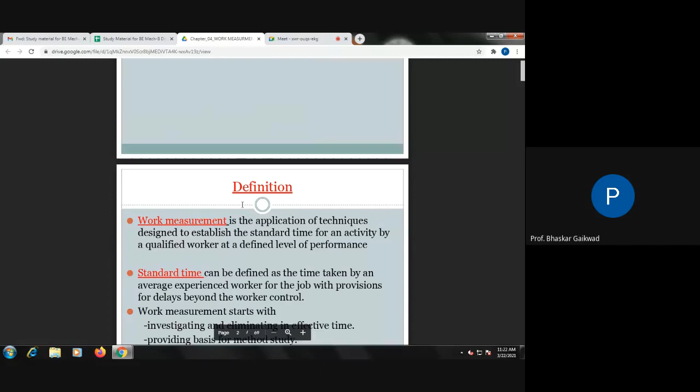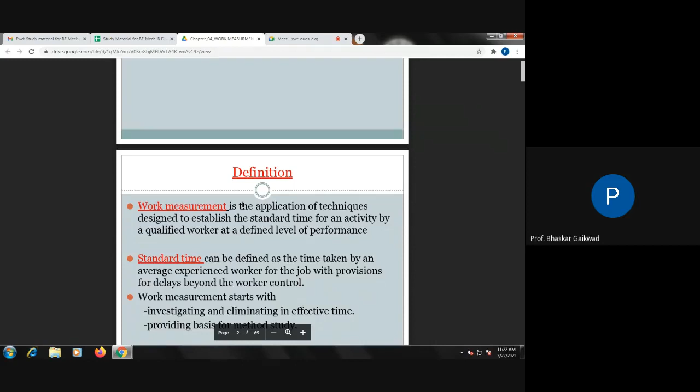Then next, standard time can be defined as the time taken by the average experienced worker for the job with provision for delays beyond the worker's control. Standard time, in technical language, means the observed time, whatever time we have observed while doing any job, into the rating, plus allowances. Which type of allowances, that we're going to see.

So the standard time is actually the time required to manufacture the product. How can we calculate this? The observed time into rating becomes the basic time or normal time. To that, if we add the allowance, it will become the standard time.

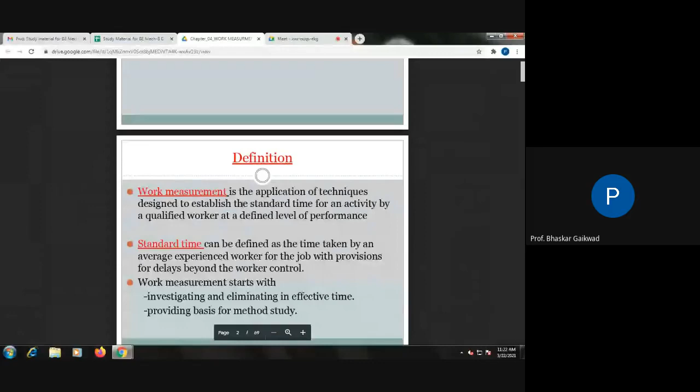Then next, what are the objectives of work measurement? Here, the downtimes or non-productive times we have to eliminate, or we have to make corrections in the downtimes. The second thing, we have to decide the standard times for jobs. Mainly, we can check the performance of the workers, and accordingly the salary, the bonus, totally the cost related to manpower will get calculated.

Then estimating man, material, machinery required by work measurement, how much man is required. Suppose we are going to manufacture 100 components: how much man is required, what is the cost of that, how much material is required, how much machinery is required, this also we will get. Next, the third point is to determine the available capacity for a given level of workforce and machinery, meaning what is actually the manufacturing capacity of our industry, this also we can judge through work measurement.

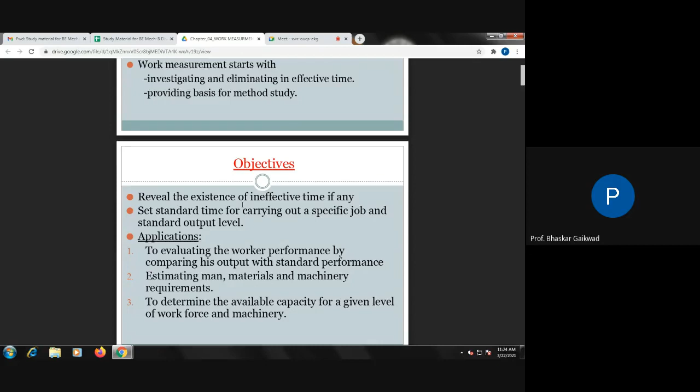Then next, we can use this work measurement to compare work methods for economical comparison: what is the existing method, and we can decide the improved methods and make the comparison. How much salary incentive we will have to give the worker is actually expected from work measurement. Facility and operation schedules, means production planning and control, are actually expected to be designed through work measurement. If work measurement is not there, we cannot go for production planning and control.

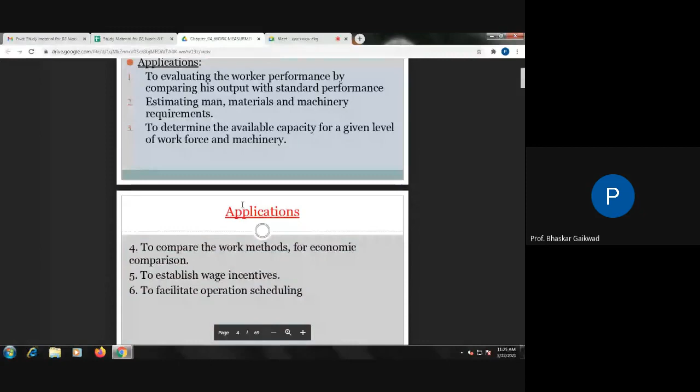We cannot give the particular payments to the workers. We cannot give the incentive. We cannot give the bonus. We cannot estimate the cost. We cannot decide the selling price of the component. So whenever the requirement is there, we can make use of this.

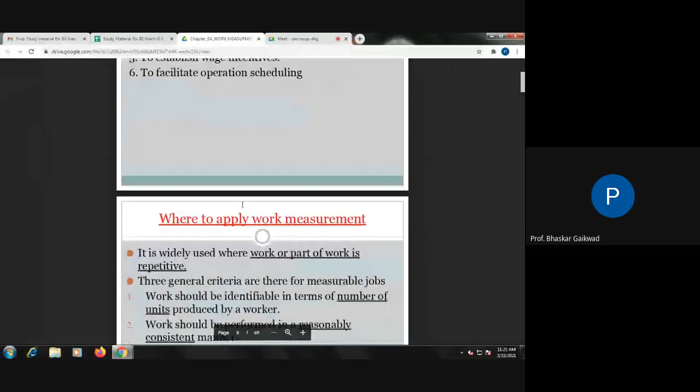Then where to apply work measurement? It is widely used where the work or part of the work is repetitive, means where mass production is there, we can use this. Next point, three general criteria are there for measurable jobs. Work should be identified in terms of number of units produced by the worker. The worker should perform in a reasonably consistent manner, means the workers need to perform reasonably and consistently. No gap in this.

Then next is the volume of the work should be justifiable to perform the study and keeping the record. How much quantity is going to be manufactured and what is actually expected. This judgment you will get.

Then the next part, basic procedure of work measurement. So yesterday we have gone through this. Select job to be studied. Which jobs you are going to select for work measurement? Normally, where the cost is very high, cost element is very high, repetitive work is there, problems to manufacture in that industry. So such jobs you have to select.

Where actually a big job is there and big time is required to manufacture this, repetitive part is there, then downtime is more. Under these conditions, you have to go there and select the jobs for study of the work measurement. Once you select the jobs for work measurement, then you have to go for the existing process of manufacturing, that is called recording. Okay.

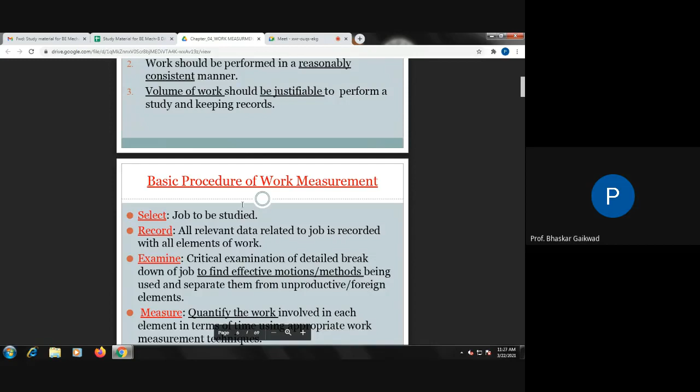How to measure the time required to complete the job. So measurement is actually, a qualified person has to do that work, and we have to decide the time. So this is the basic procedure. So here, basic procedure for work measurement.

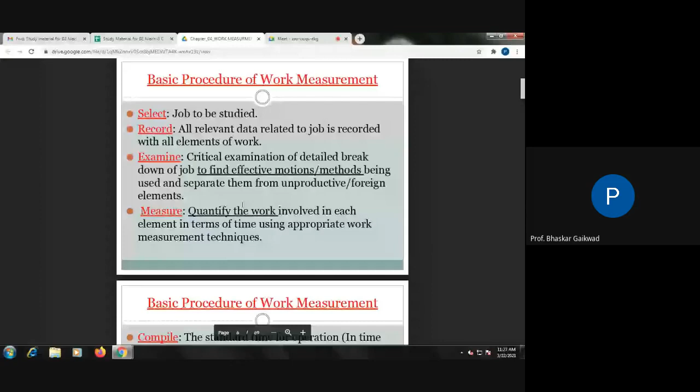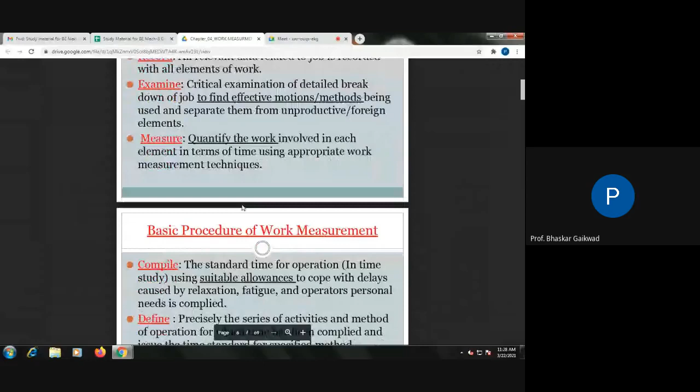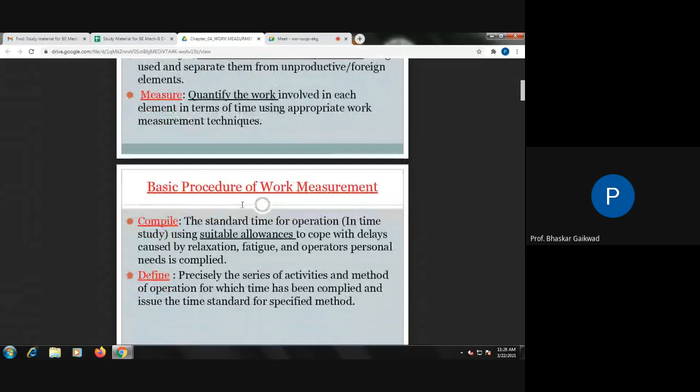Next page, compile these standards along with allowances. So many allowances are there. So here's the personal need allowance, contingency allowance. So many allowances are there. So you have to compare the different methods, means existing methods and new methods. Then define the new methods and install that new method. So these are the procedures for work measurement.

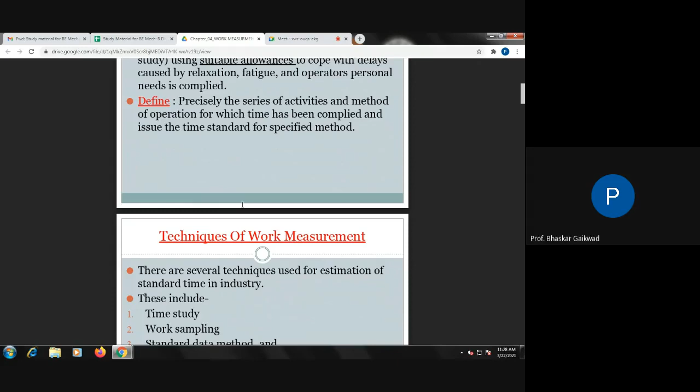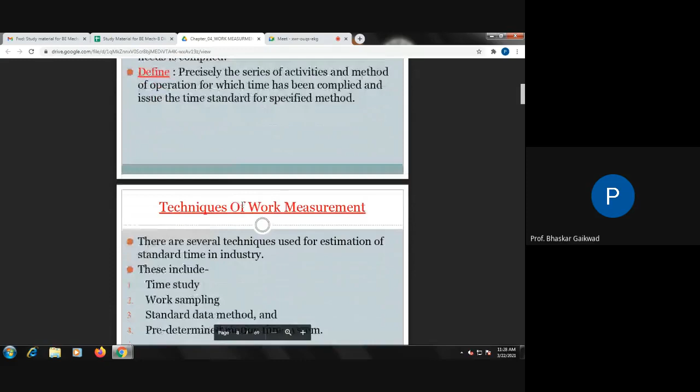Now technique. Yesterday we came to this point. Various techniques of work measurement. There are several techniques for work measurement used for estimation of standard times in industry. This includes time study, work sampling, standard data methods, predetermined motion time system. So these are the four techniques used in work measurement.

Time study means here actually we have to observe the time while manufacturing the jobs. Work sampling: when mass production is going on, two, three samples we can take, and on this basis we can take the work measure. Standard method means analytical methods with some standard data available with us. Through this we can do the work measurement.

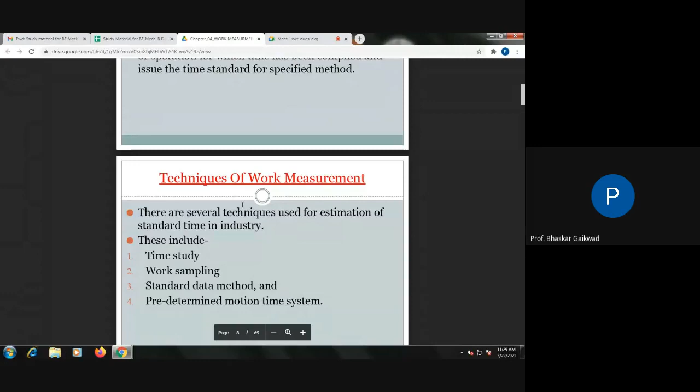Predetermined motion time system means here we can use the camera. We have to check the motion of the man while working, and those motions you have to note down along with the times required to complete that motion, and is it possible to reduce certain motions, is it possible to reduce this time. So through this predetermined motion time study we do this. So these are the four techniques of work measurement.

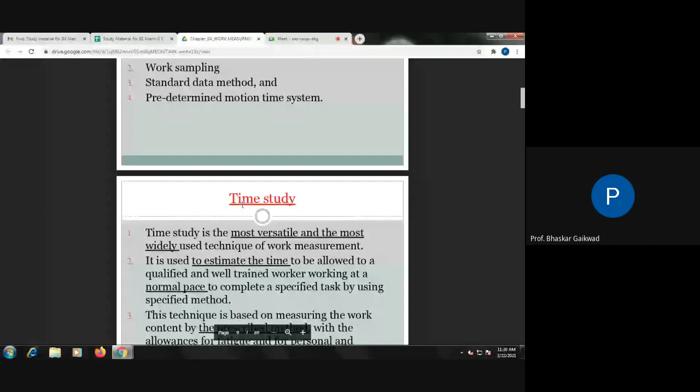Okay, now first we'll go through the time study. Once again, which part is important, and what are the numerical problems related to this, we are going to see on the blackboard. Time study is the most versatile and most widely used technique for work measurement. So more than 80-90% time study is used in industry for work measurement.

It is used to estimate the time allowed to qualified and well-trained workers. Means you have to select a qualified, experienced person, well-set person having the 100% level of performance. You can select that method. This technique is based upon measuring the work content of a prescribed method. Method is prescribed. What is that? We are going to see. With allowance for fatigue and personal needs and unavoidable delays.

So first, the time we require for the work measurement, that we have to observe, multiply by rating, and in that we have to add the allowances: fatigue allowance, personal, unavoidable delay means the contingency allowance. How many allowances are there? First we'll see this.

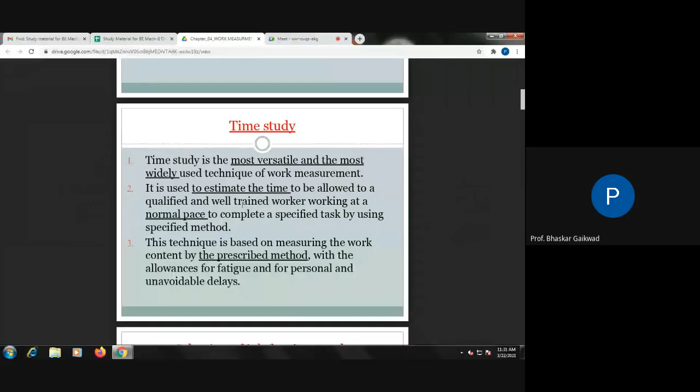So here, in short, again the selection of jobs, new jobs. We can use this work study for operations that are bottlenecks in the production. Some problems are there. Bottlenecks means problem. Whenever a problem is there in production, you can make use of work measurement.

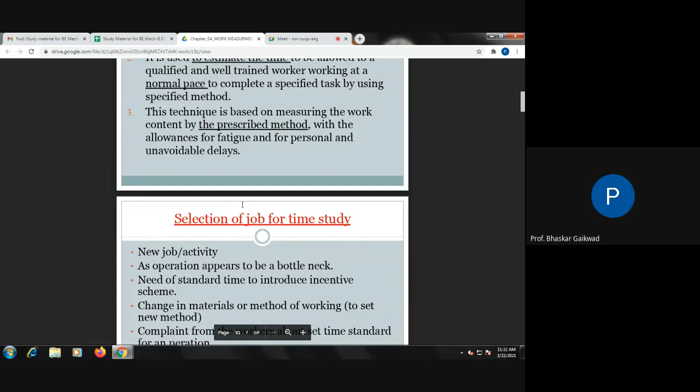Then need of standard time to introduce an incentive scheme. Suppose I want to introduce some incentive scheme, motivational thing and bonus. Then we require this. Then change in materials or method of working, new set method. So if you want to change material, then we can use this.

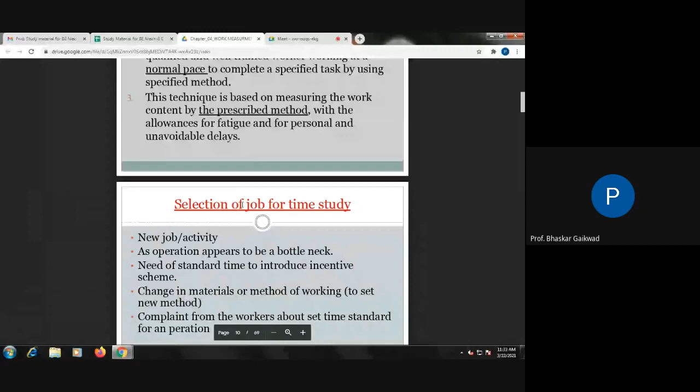Excessive idle time of machines, extremely low output, means some machines are taking more time. Why is this so? Under such situations we can use this.

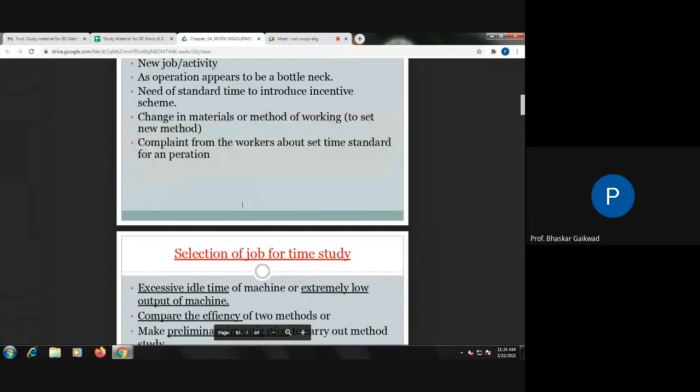Compare the efficiency of two methods, present method versus, as I gave examples yesterday, we can manufacture jobs on a lathe machine and the same job we can manufacture on CNC.

Compare this. Make preliminary investigations to carry out the method study. First the investigation, then you can concentrate on the most costly jobs. Need to go for work.

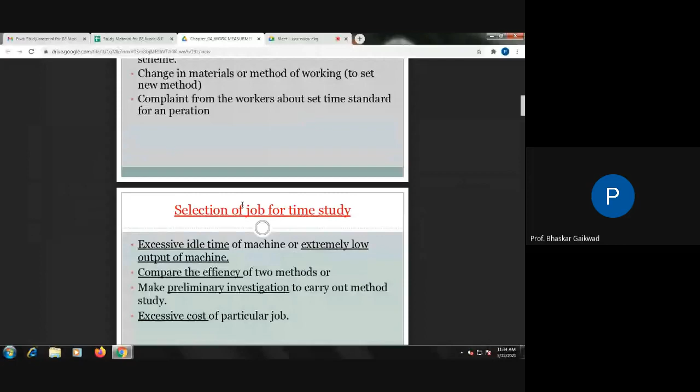Then selection of worker for time study: qualified, experienced, high levels. This much you have to remember.

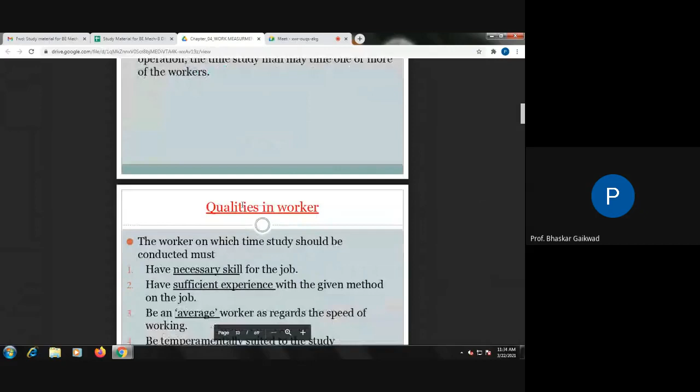Quality of workers, skill is there, experience is there, and they should have good knowledge. Such a person we can use for time study.

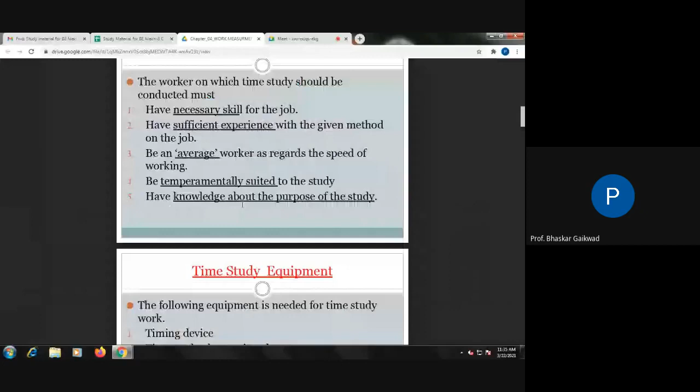Time study equipment, this is important. Some points are repeated here, but always remember while making the time study, qualified, skilled, experienced and higher level of persons are required.

Whenever a high costly product is there and the machine requires more time, we need to introduce an incentive bonus scheme. We have to avoid bottlenecks in production. Under such situations we can apply work measurement, or when you want to change the present method into an improved method, then we can use time study.

Next, time study equipment. The following equipment is needed for time study. So many equipment are there.

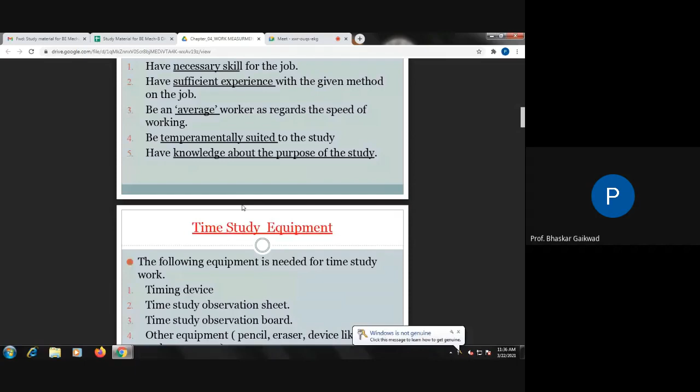Timing devices, which may be a stopwatch, time study observation sheet, specific data required for this, time study observation board, then other equipment like pencil, eraser, device like tachometer, etc. This much device is required while going for work measurement. So we require a stopwatch, observation sheet, boards, pencil, eraser, like this. This is the common equipment used in work measurement.

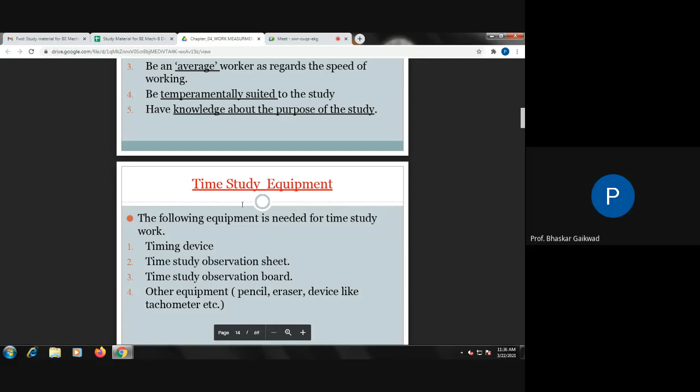Timing device, so under this, stopwatch is the most widely used timing device for time study. I will show this diagram of the stopwatch. So here, this is the top stopwatch. This is the stopwatch here. Nowadays there is also a digital stopwatch.

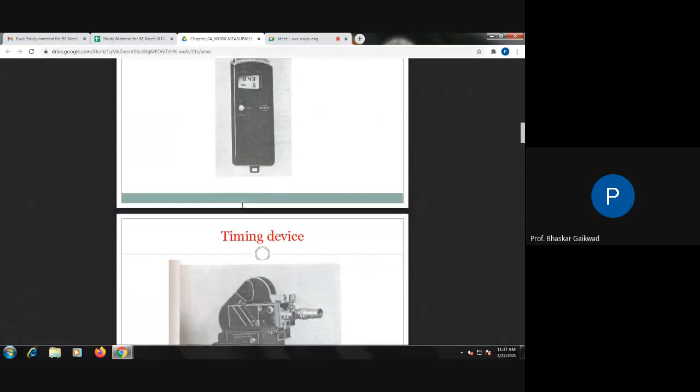Again here, a camera is there. Okay, this is the camera. This is the digital board. So this type of device has been used for work measurement. This camera is normally used for micro motions or predetermined motion time study. Here a digital meter is with us.

We can use the tachometer also. So this stopwatch is normally used for work measurement, the most widely used timing device for time study, although electronic timers are also sometimes used.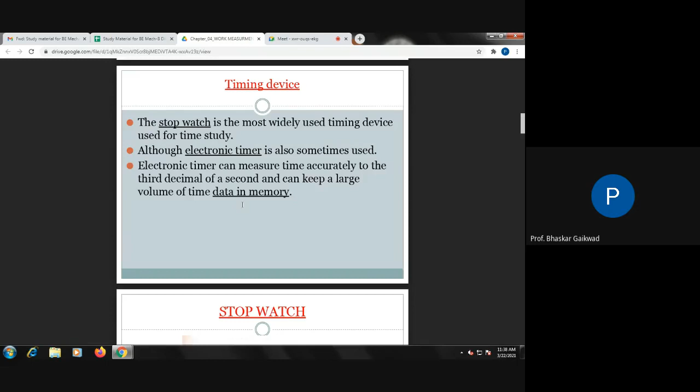We can store it in the memory. So here is the stopwatch, with some parts. Two types of watch hands are there.

One is the small pointer and the other is the longer one. One revolution of the small pointer covers half a minute, and one revolution of the longer pointer covers 1 minute.

So this is the watch, and at the top a knob is there. It will start by pressing this, and whenever we want to stop it we can press the other one. So A and B knobs are there, which we use for starting and stopping.

The small pointer shows half minutes, meaning one revolution gives half a minute, and the longer pointer's one revolution gives 1 minute. With the help of the least count of the stopwatch, we can note down the time required for a particular activity.

Now this is also available in digital form. Nowadays we use it without the small and greater pointers; the digital value can be seen on the display board of the watch. Okay, so these are the timing devices.

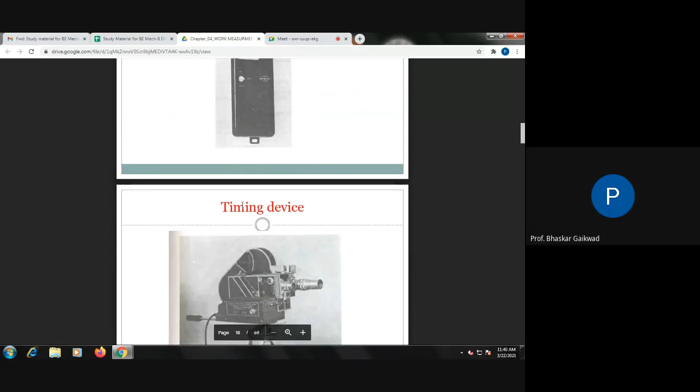Then next, this camera can capture the figures, and by slow motion we can compare the times.

This is also one of the instruments used for measurement of times. Nowadays, this instrument is less used in industry, but accuracy-wise, it is better than the previous two. So here is also one instrument: Productolog, electric motor-driven time recorder.

This is also used now. Here is the time study sheet. This sheet is actually required while going for work measurement. So what are element operations? Who actually conducts this? Which type of department is there?

So many things are there, and through our recording, the various vertical and horizontal columns are there. Here we have to multiply the observed times into performance rating. You will get the normal time. If you add the allowance to that, you will get the standard time.

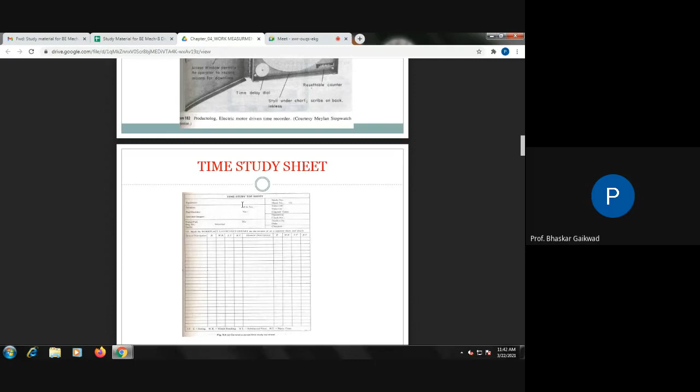So we're going to solve the problems as per this sheet. This sheet is required in industry. Very simply, on top of the sheet, there's information about the job, information about the workers, information about the time devices, date, and checking. Below this: activity, observed times, performance rating, normal times, and allowance. This sheet is there, and total standard times will be there. So this sheet is also required.

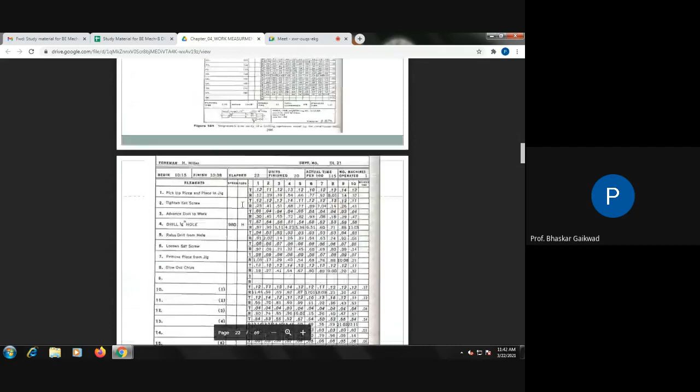Here the time study field sheet is there. There is also one more sheet: the observation board. Instead of a sheet, we can write on the board itself. We'll solve these problems on our blackboard.

Next lecture. There is also the same board there.

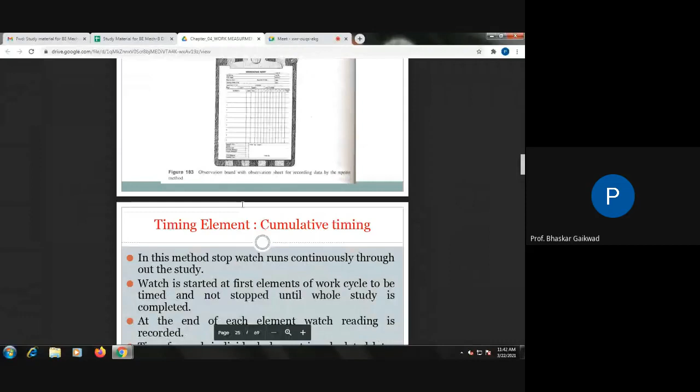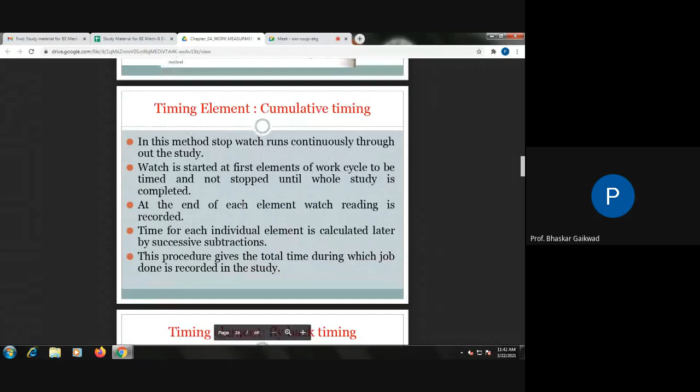Now, timing element: cumulative, and the next one is flyback timing. Two types of watches are there: first one is cumulative and second one is flyback. So what is this? We're going to see.

First, the timing element, cumulative timing. In this method, the stopwatch runs continuously throughout the study. The watch is started at the first element of the work cycle to be timed and not stopped until the whole study is completed. At the end of each element, the watch reading is recorded. Time for each element is calculated later by successive subtractions. This procedure gives the total time.

Recorded in the study. Very simply, cumulative means the watch keeps on recording the time required to perform the activities required for particular jobs.

For example, let us consider our gear blank, starting from drilling, boring, machining. If we start that watch, then the timing will keep recording.

Here, what is actually the time required for facing, that you have to note down. From facing to boring, how much time, you have to note down. Then turning, step turning, next operations, their time - meaning up to five operations - but it has been split.

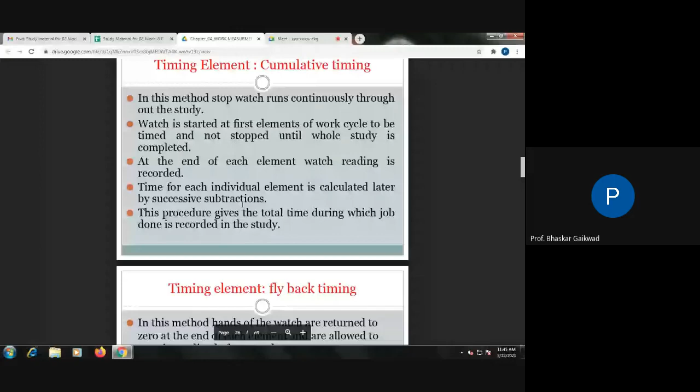Now, flyback. By just getting the concept of flyback, you will come to know the difference between cumulative timing and flyback time. Now I will read and then explain.

In this method, the hand of the watch returns to zero at the end of each element. First of all, press that knob, the watch will start. At the end of that activity, stop it, it will become zero and allow it to start immediately for the next element. Suppose we have started this watch at zero and it will run, and once the activity gets over, we have to stop there.

Meaning after 15 minutes the activity is over, so at 15 minutes you can stop. Then if you want to measure the next one, immediately you can start.

Time on and off are also mentioned. These are also called check times, and the difference gives elapsed time. Sum of the elemental times, ineffective times, or check times are also called record.

Here, in simple language, I will tell you the difference between the cumulative stopwatch and the flyback stopwatch. In the cumulative stopwatch, it consists of a winding knob on the head of the watch. Now you can observe this watch.

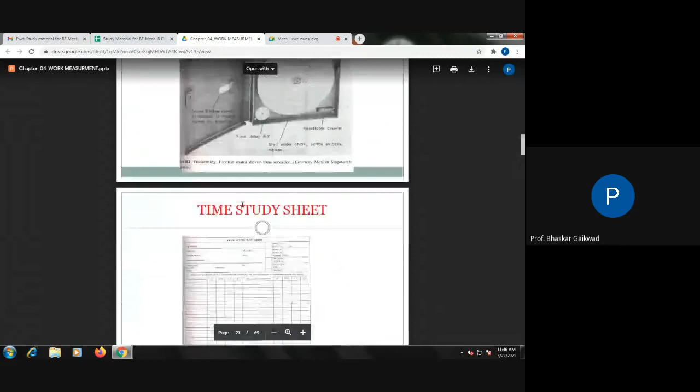You see that this is the watch. It consists of a winding knob on the head, marked B. Movement of hands is started by pressing the winding knob B first time. Movement of hands can be stopped by pressing the winding knob second time. So if you press first time, it will start. If you press second time, it will get stopped.

While pressing the winding knob third time, the hand comes back to zero. So with the help of this winding knob, it will return to zero. The cumulative stopwatch is allowed to run continuously till the number of cycles have been done. So here three types of pressing: if you press B, the timing will start; press B second time, it gets stopped; press B third time, the pointer will come to zero. This is cumulative, and each time you can measure the time, or from the stopping to the further reading, that also we can do.

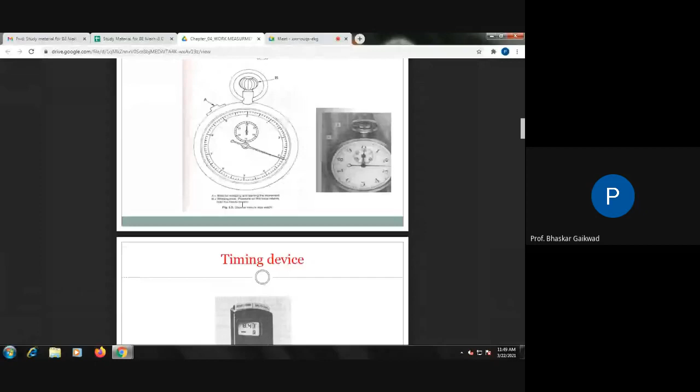Once again I will repeat so it's easy to understand, because nowadays in industry the stopwatch study is important. Now you can look at this stopwatch: here a big pointer, a small pointer, knob B, and knob A. The small pointer completes one revolution in 30 minutes. The big pointer completes its rotation in one minute. Like this, we need to calculate the least count. Now what is the cumulative stopwatch method? First, the B type knob is pressed, and at that time the big pointer and small pointer must be at zero.

When we press B, it will start rotating - first time. Second time, if you press, it will get stopped. Third time, if you press, it will come back to zero. This is cumulative, repeated once again: first press of B, the pointer will move; second press, the pointer will stop at a particular reading; third press, the pointer will come to zero. This is the cumulative stopwatch.

Now, flyback stopwatch - what is the difference between this and cumulative? First and second press are the same procedure as cumulative, but there is one more knob on the left side, the A type. It starts the movement of the hand further; the pressure knob present on the left side is used to bring it back to zero. So in flyback, the third time you press, it continues for reading - you get the reading further, and when you press winding knob A, it will come back to zero. So you have to remember: the left hand A knob in flyback is required to bring the pointer back to zero.

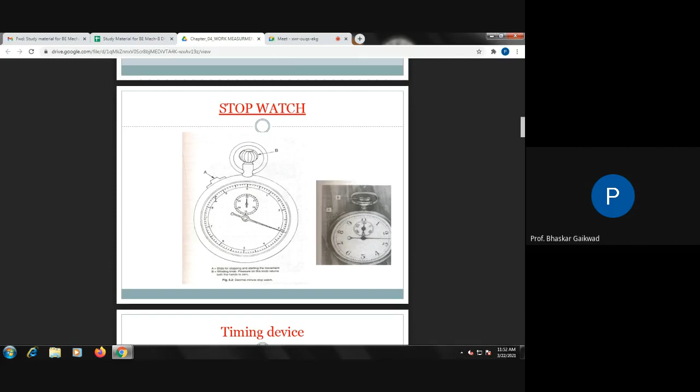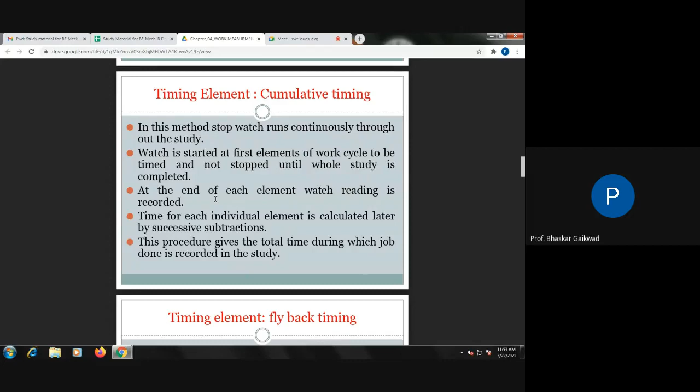In the cumulative timing method, the stopwatch runs continuously throughout the study. The watch is started at the first element of the work cycle to be timed and is not stopped until the whole study is completed - if you don't press it, it will continue. At the end of each element, the watch reading is recorded. Time for each individual element is calculated later by successive subtraction. This means we take continuous readings, and each element's time is subtracted from the total. This procedure gives the total time for each job done, as recorded.

So cumulative watch is used to take the reading and stop the job. In the flyback method, the pointer or hands of the watch return to zero at the end of each element - meaning by pressing the A button, it returns to zero - and are allowed to start immediately for the next element. Each time we start the pointer, it goes on rotating, but if you press the A knob, it comes to zero. This means each element's separate time can be calculated.

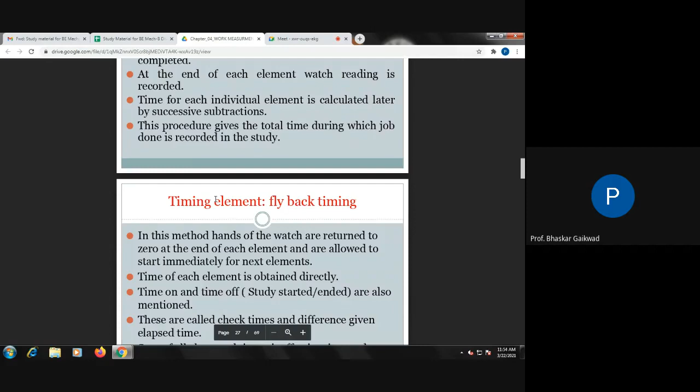Time for each element is obtained directly. Time on and time off are also mentioned - off times or on time, as seen in the sheet. These are called check times, and the difference is the elapsed time - whatever waste time there is, we can account for that too. Sum up all element times, and ineffective times and check time are also recorded.

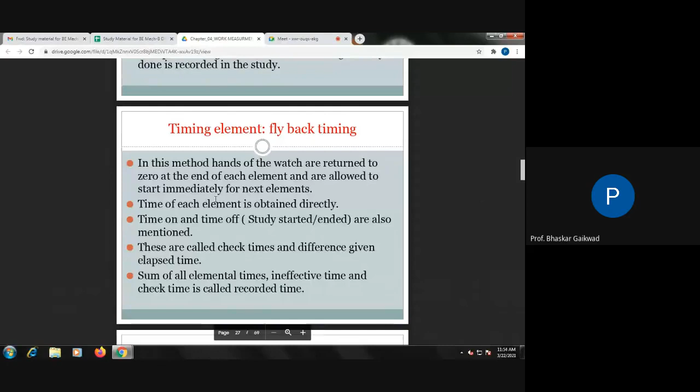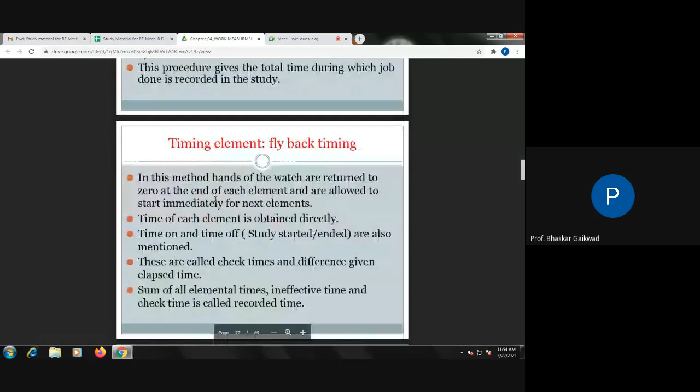Means effective times, ineffective times, and elapsed time. This also we can record. So the time study operation sheet is there. What it contains? Previously we have seen this sheet. Here is the sheet. This sheet, in brief, what it contains is given here.

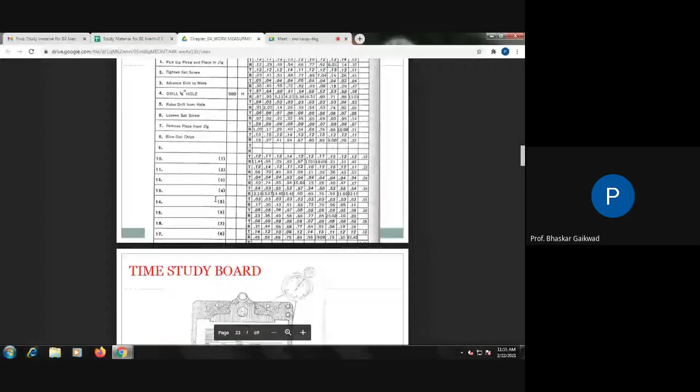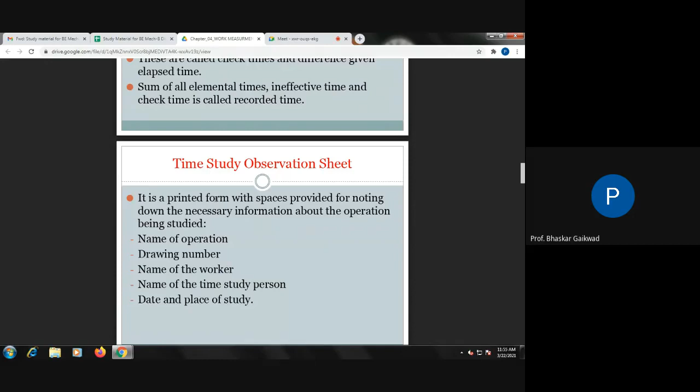Cumulative and flyback. What actual observations are required in the sheet. It is in printed form with space provided for noting down the necessary information about the operation: name of the operation, drawing numbers, name of the workers, time study person, date and place. So every information is always there.

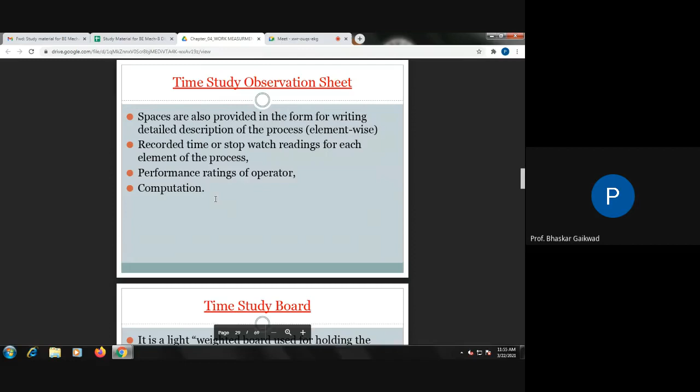Then the time study observation sheet contains spaces provided for writing details, recorded times, and performance rating for the operators and computations. So here it's observed times. You have to note down, after that, performance rating. So observed times into performance rating, you will get the normal time or basic time, and to that, if you add the allowance, you will get the standard time. So the procedure once again, time study, same procedure is there.

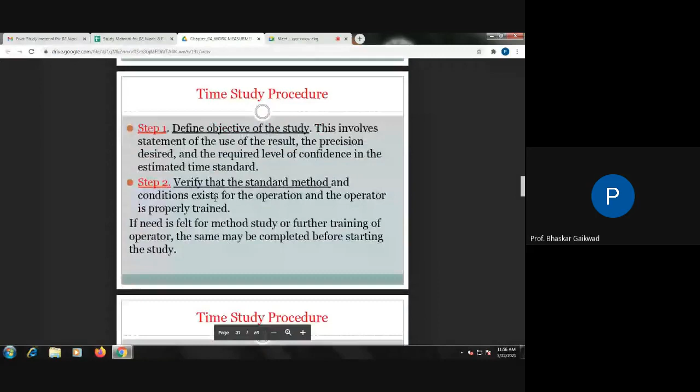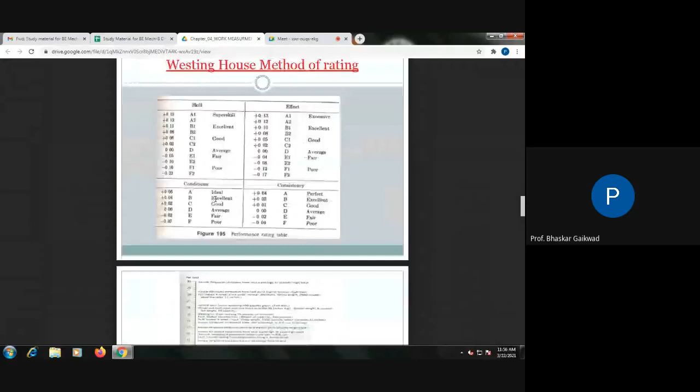Allowances. So already I told how to calculate standard time. First, you have to make the observations for the job you have selected by using a stopwatch. So observed times into the rating plus allowances. Which allowances are actually required in industry? It is given in the sheet. Okay. So what actually is allowance? Allowance means the time required to fulfill the given activity.

Sometimes personal allowance is there. Personal allowance means allowance required to fulfill their personal needs, maybe lunch, maybe toilets, or any other thing. If the worker is wasting certain time, even though that time is considered in time study, that is called allowance.

Contingency allowance means the production is going on, but sometimes the power will go off, so we cannot do anything here. Power cuts are in the hands of MSEB. Okay, so we have to consider certain allowance before planning the work. Sometimes power will go off, and this much time will get wasted. So that allowance also we have to consider. This is called contingency allowance. So here in work measurement, different types of allowances are used.